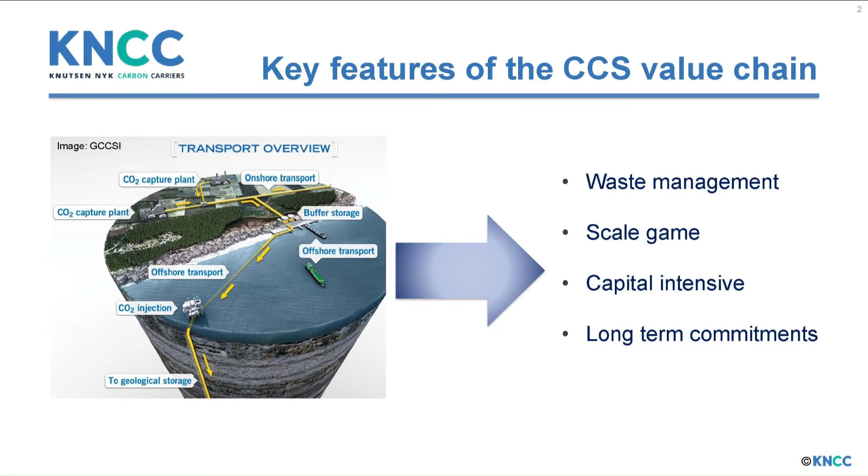And everybody should know that if you're dealing with waste management, then you have to do this as cheaply as possible. And one of the ways to achieve low cost is scale. So waste management needs scale. So this is also a scale game. And thirdly, this is extremely capital intensive. I think we still haven't seen the total cost and the consequences for those who will pay for this, consumers and governments and businesses. And it comes with a huge cost for a product that doesn't carry any value. So we need to have a sharp focus on cost.

And finally, a very important thing to note here is that this is long-term commitments. You cannot start the CCS value chain today and close it in 3 years' time. It doesn't make sense. This is a very important part of the globe's greenhouse gas reduction objectives, and so this is something that we establish for the long game. From a shipping perspective, that's obvious, but it's also for the capturing or the emitters who would have to realize this, and also the storage providers.

Very important. And one important thing to note here is that we are focusing primarily, for the time being, on technical matters in this case. But I think we owe the society and the consumers that will pay for this that we also start to highlight the cost side. Because it may become a shock for many people when they realize the cost of capturing CO2 and handling it in a value chain.

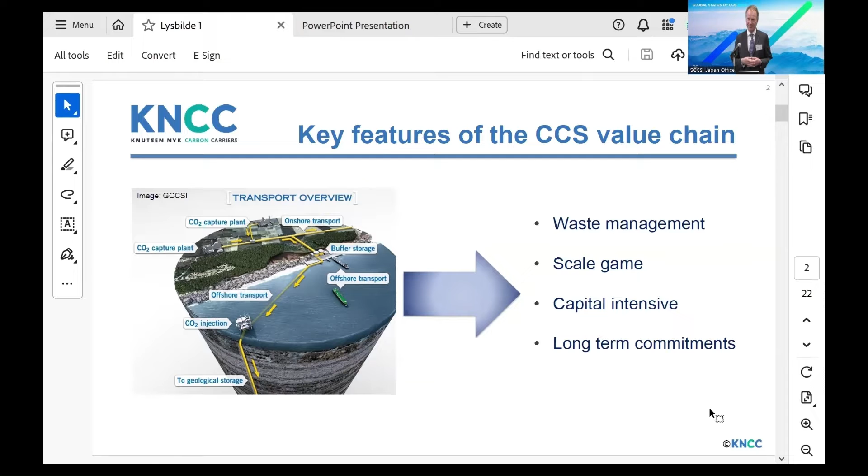The following presentation is divided in 3. We are focusing first on introducing KNCC, Knutsen NYK Carbon Carriers. Then part 2 is sort of a qualitative assessment of the 3 modes of CO2: low pressure, mid pressure, elevated pressure. And the third part of the presentation is focusing on where we are in KNCC when it comes to technical

development. I think the key messages that we would like to give, and I hope that you will sit back with that reflection after this presentation, is that we in KNCC are NYK's and Knutsen Group of Norway's key gateway of CO2 shipping. And secondly, that we are offering elevated pressure technology for handling CO2, but we are also including mid-pressure vessels and low-pressure vessels in our offering.

When it comes to part 2, I think it's very important that we can show you that elevated pressure has certain benefits that are unique compared to mid-pressure and low pressure. But at this stage, there are also quite a lot of uncertainties because nobody has actually built this yet at scale. So the findings in the study are very interesting, but still need more work in order to know which way to go.

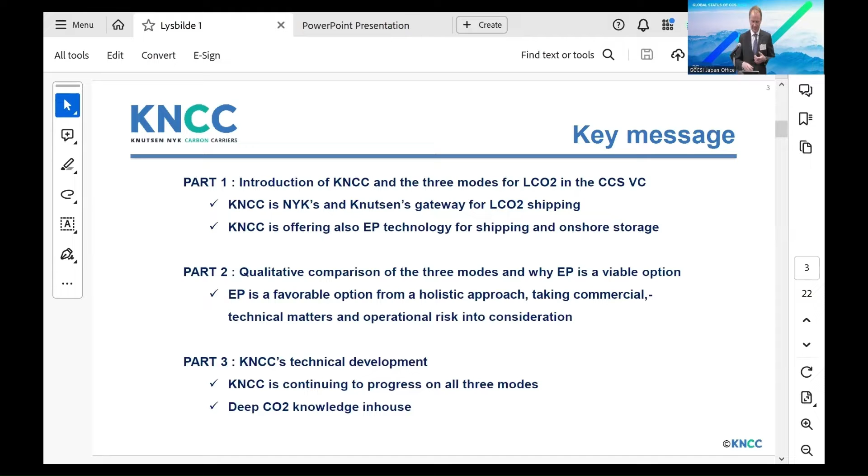I just wanted to mention a few things about our owners. We, as KNCC, are a startup company. We are 5-6 people working on the western coast, in Haugesund, and where we have gotten till today would have never been possible if we didn't have the strong support from NYK and Knutsen, our shareholders together. And I think it's quite interesting to see what we have been able to get involved in, sitting on the western coast of Norway in a tiny little village called Haugesund.

And we are primarily working globally and we don't put much effort into marketing. But the whole elevated pressure ambient technology has gained a lot of attention on a global basis. And I think that has come when people realize that the whole CCS value chain comes with a cost. And that cost is perhaps too much, so they need to look into new ways of handling all this.

In addition, we are shipping experts. We know how to serve a value chain. And when it comes to these kinds of value chains that we're discussing here today, I think the 2 points of regularity and frequency are extremely important for a shipping company that wants to serve such a value chain like this.

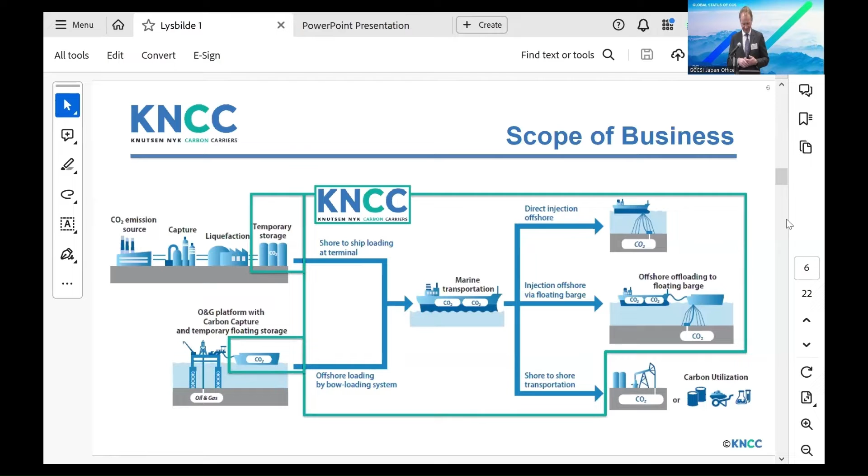So in that respect, we are the only company that is offering vessels offering the full range. We're offering elevated pressure, mid-pressure, low-pressure vessels. And we have what we call terminal-to-terminal vessels, or direct injection vessels, offshore vessels, for elevated pressure. And when it comes to mid-pressure and low-pressure vessels, we are dealing with terminal-to-terminal vessels for both those two modes. And of course, the tanks for mid-pressure and low-pressure are sort of, I wouldn't call it standard C tanks, but it's C tanks. And for our elevated pressure vessels, we have our own cargo tank cylinders storage system.

And then you can see on the bottom here the illustrations of how the vessels are supposed to operate. It looks very simple when you look at these drawings here. It's not that simple in practice, we think. But from an illustration point of view, these are sort of the three modes, three alternatives that we are offering.

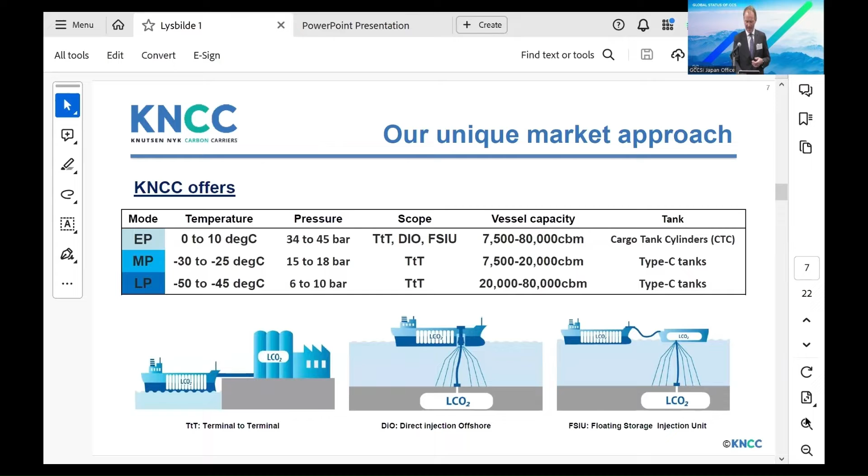If we go to the next slide, that is setting out the offering when it comes to sizes of vessels. We are offering 20 to 80,000 tons carrying capacity when it comes to elevated pressure. Medium pressure, we have an upper limit on 20,000 tons. And when it comes to low pressure, we think that there's, for the time being at least, an upper limit on 80,000 tons. Then the first vessel order will probably be mid-pressure vessels, where the design is more mature than, for instance, for low pressure.

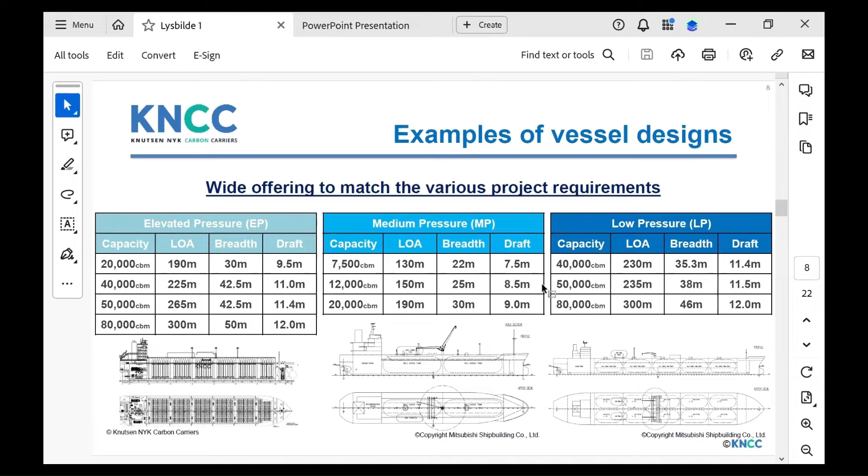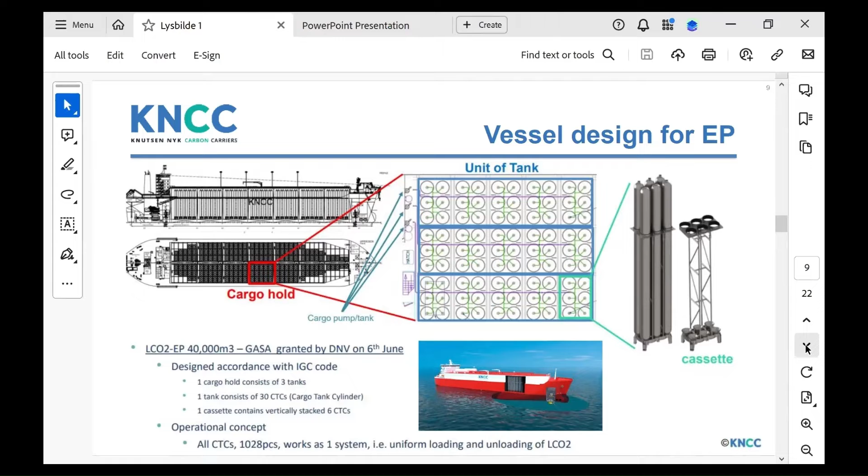And of course, we also realize that if you are offering elevated pressure vessels, you need to offer also elevated pressure onshore tanks, which we have illustrated here. We have designs for onshore tanks when it comes to simple terminals. We have floaters, we have barges, and we have floating injection units as well. So the offering when it comes to elevated pressure is quite unique and wide in that respect.

So before I'm moving on to part two, I would like you to remember two things. KNCC, we as a company, are offering all modes of handling CO2. And we regard the cost side of this as one of the key drivers, probably the most important thing to have in place if this CCS business is going to fly. Next.

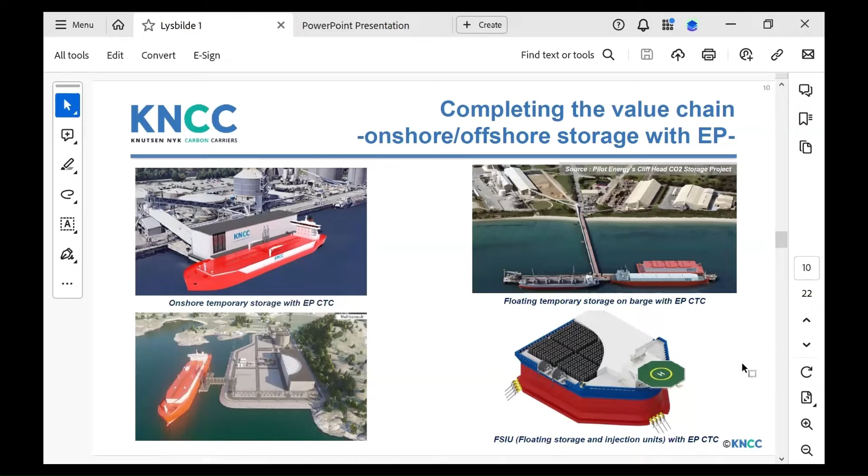The following slide sets out the key parameters when it comes to comparing elevated pressure, mid-pressure, and low pressure. We have divided that into 5. It's operation and risk matters. It's cost and energy consumption matters. It's net transporting volumes on the vessels. It's how the CO2 behaves in the various modes. And it's also a bit about the tanks that will be used for handling the various modes.

This slide is setting out basic information. It only says that when you are deciding which mode of CO2 you're going to choose, you need to have some matters on the front of your mind when it comes to operation. And that is, of course, that you need to have a buffer, to be on the safe side when it comes to dry ice formation risk of the CO2, the triple point.

That is extremely important. Secondly, it's the matter of impurities, which we will hear more about from Matt afterwards: how elevated pressure, mid-pressure and low pressure are able to handle impurities in the CO2. And CO2 specification is a very hot topic in our little society these days.

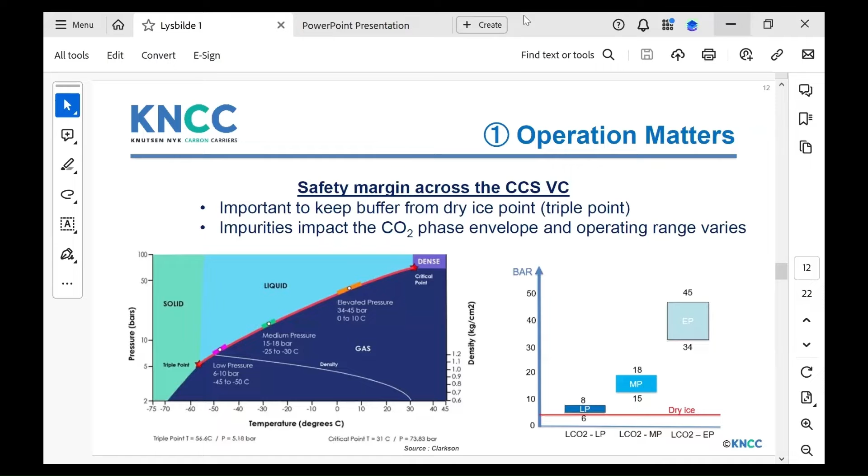And Northern Lights had their online webinar regarding their new required specification for CO2. I think it was even more popular than this seminar today. So it just tells us all that the CO2 specification is a really, really important matter that needs to be observed. Next slide, please.

When it comes to energy consumption, we have looked into liquefaction, storage, transportation and injection to the wellhead. And from that point of view, we are not surprised by this, but it seems that we have found that elevated pressure across the value chain is less energy intensive, i.e. less cost intensive than the other modes.

In many ways, that goes without saying, because apparently we use a lot less energy by keeping the CO2 at ambient temperature. But finally, we have had a study now evidencing these facts for us as well, and that is of big importance to us. And I think, again, it boils down to the cost side here. If you are contemplating building a CCS value chain, you need to take these kinds of findings into consideration. Next slide, please.

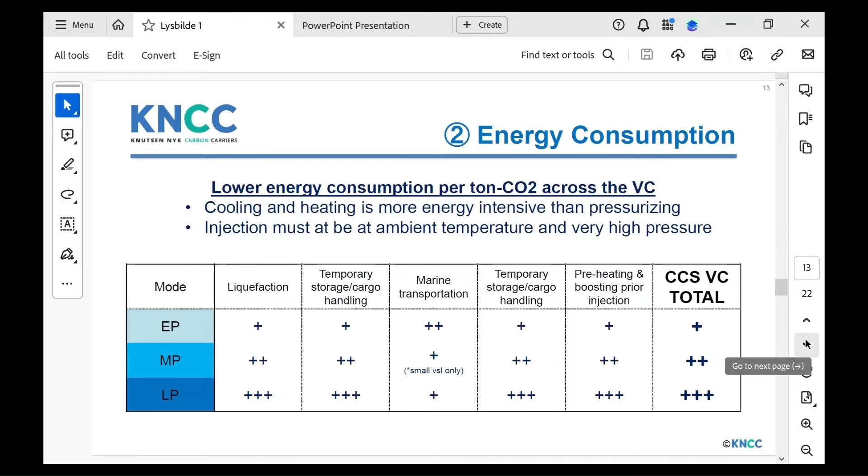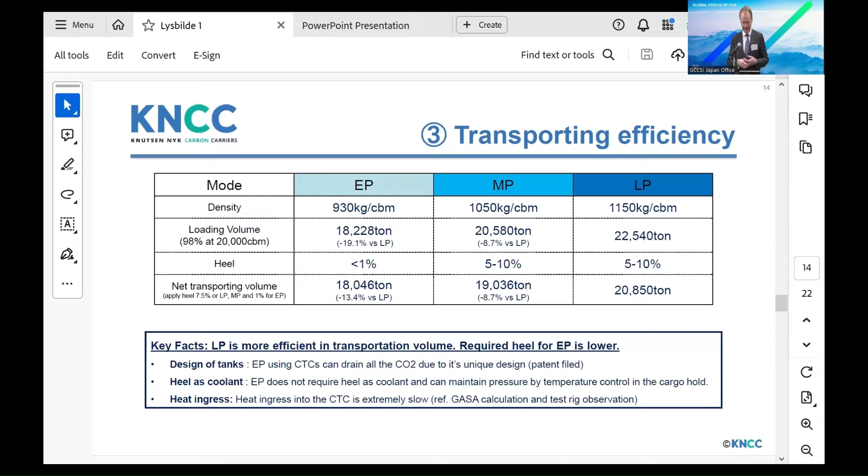We all know that there's no free lunch in the world, so even elevated pressure has its disadvantages, and the most important one is actually the density. Density of elevated pressure compared to mid-pressure and low pressure is less, so that means that you need bigger vessels, or you need to do more rounds to handle the same volumes of CO2 compared to low pressure and mid-pressure. However, there are some mitigating factors, but the overall conclusion doesn't change.

But there are some mitigating factors, for instance the required heel in the tanks, i.e. the required amount of CO2 that you need to keep in the tanks after discharging. And the heel requirement for elevated pressure is far less than for mid-pressure and for low pressure. This is related to the need to have the tanks at a certain cool temperature when you're going to load the CO2 on board the vessel again. But as I said, it makes the picture slightly less bad for elevated pressure, but the overall conclusion is that the density for elevated pressure, also including heel, is less than for the other two modes. Next, please.

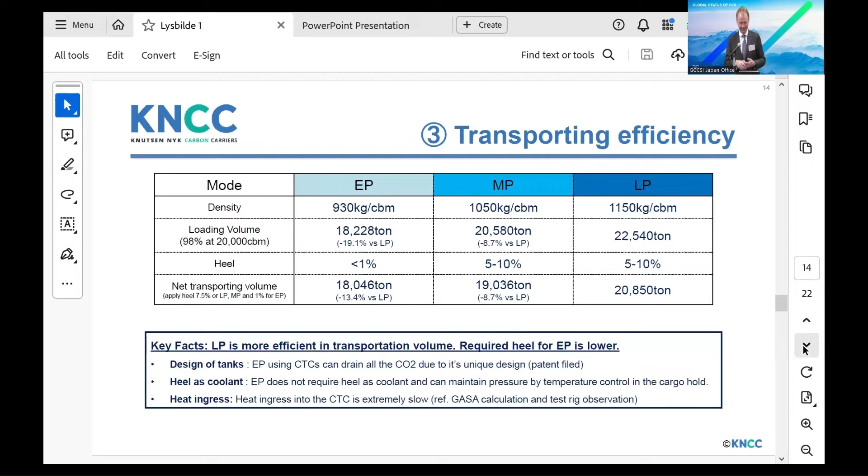I'm coming back to this afterwards, but in Haugesund, where we have our office, we have also built a CO2 test rig, where we have stored CO2 in our tank system for several months. And we have discovered two things, I wouldn't say it was a surprise, but we were happy to have it confirmed. And that is that when you keep the CO2 in the cylinders, even when the outside temperature is fluctuating, the CO2 is quite stable and moves along with outside temperature.

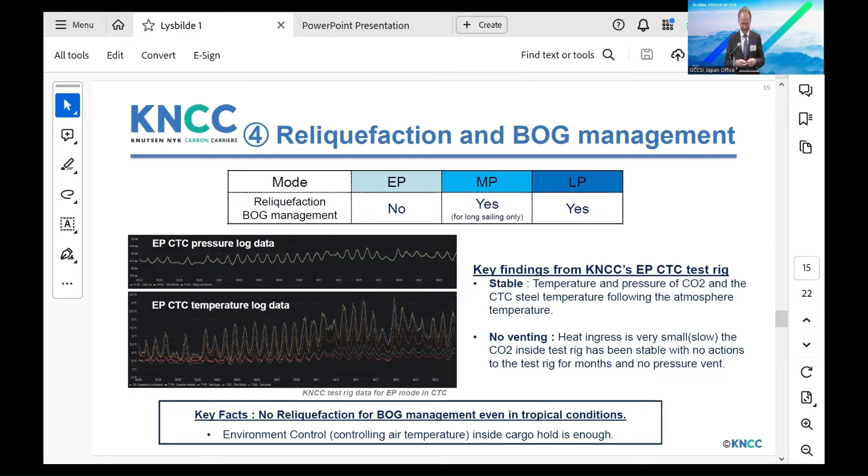And if you look at the black diagrams here, it's a bit difficult to see on the screen, but it shows how the CO2 is very stable over time. This time scale here is over 2 months. So that means that, for instance, we don't have any boil-off from the tanks, and we don't have a need for re-liquefaction when we are carrying the CO2. That is definitely a plus. Next.

But also, of course, when it comes to putting low pressure tanks, for instance, on shore, that comes with certain challenges, both in production and construction, and also timing wise. But when it comes to the tanks in itself, I think it's fair to say that it's still technology that needs to be further developed, but we will get there in the end.

So summarizing part 2 then, I hope that you have understood that there are certain pros and cons with the 3 modes of CO2. And the conclusion when it comes to which mode you should use is really dependent on the project-specific specifications that you're dealing with. And the most important thing is that at least we are evaluating those 5 parameters that I have discussed now.

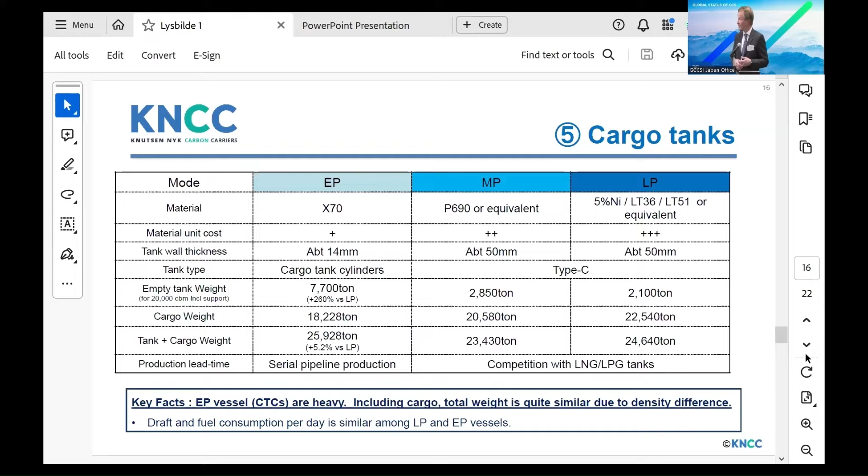I will quickly start to summarize and conclude with part 3, and that is just a quick overview of our technical development over the last year or so. So yeah, next slide. Sorry, I forgot. Next slide. And one more next. Here we are.

And further, we have done what we refer to as HAZID, which is sort of identifying all major risks related to our systems in order to verify that this is acceptable within a sort of risk frame system as well. Next slide, please.

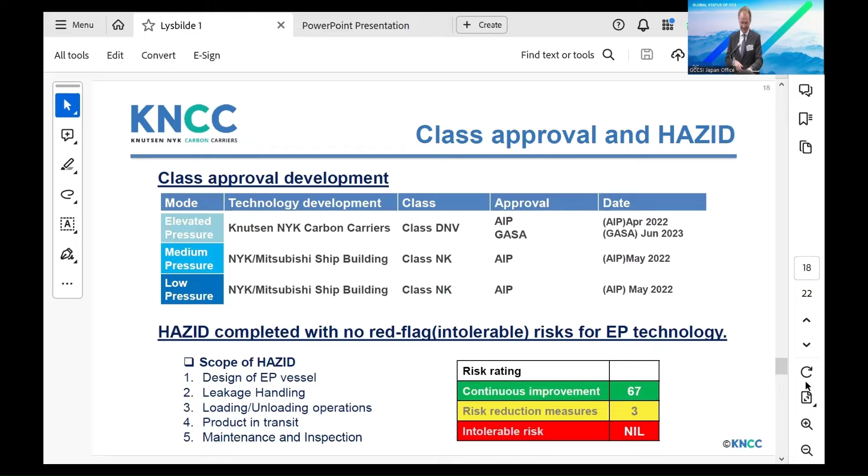We have completed phase 1 for this rig. And now we are in the planning and started to do phase 2 testing, which is focusing on corrosion and leak testing. And phase 3, we are aiming to look into how CO2 will react to impurities. So this is quite interesting from an industry point of view.

And for us as a company, it's also quite interesting because we are learning a lot, and we foresee also to use this facility to train crew for vessels going forward. And this will provide sort of an excellent way of educating all the crews on the CO2 vessels that will be needed in the future. And that is quite a lot.

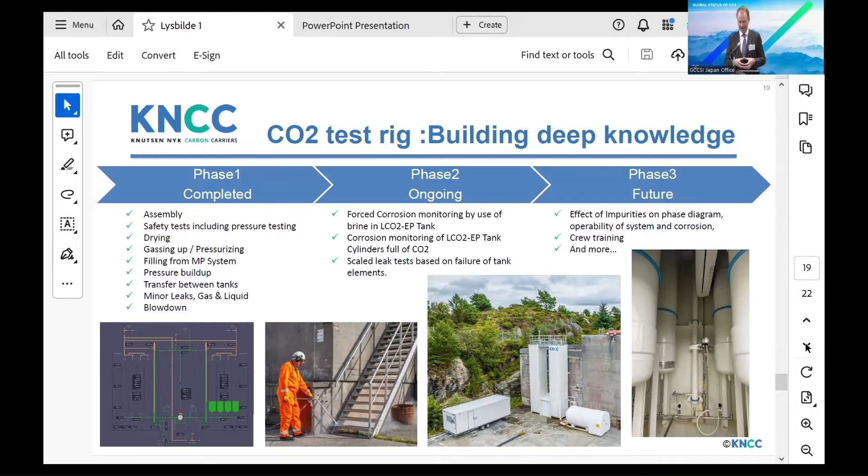And if you show the next slide, please, we have been reaching out to the companies that we have been working with over the last 2 years. And this is a few of them. I would say it's not half of them, but around half of the companies that we have been engaging with. And to us, it's a big pleasure to see that there are so many companies that are looking into elevated pressure for real, and that they see the benefits of working and developing elevated pressure as a third real credible alternative.

I really hope that you will be of the same opinion after this presentation. And if not, please call me up. Please approach me after this one, and then I will convince you. Thank you very much for the attention.

Mr. Anders, thank you very much. Now we are moving on to the next presentation. We will have a presentation about the comparative study results regarding EP, MP, and LP via the CCS value chain from Chiyoda Corporation and NYK. NYK has been leveraging its extensive experience in ocean-going shipping to continue creating new value through decarbonization efforts. Since its early period, Mr. Takahiro Rokuroda, Deputy General Manager of the Green Business Group, has been involved in NYK's decarbonization efforts. Drawing on his wealth of experience, he will explain the comparative study results for the three methods of liquid CO2 transportation throughout the CCS value chain.

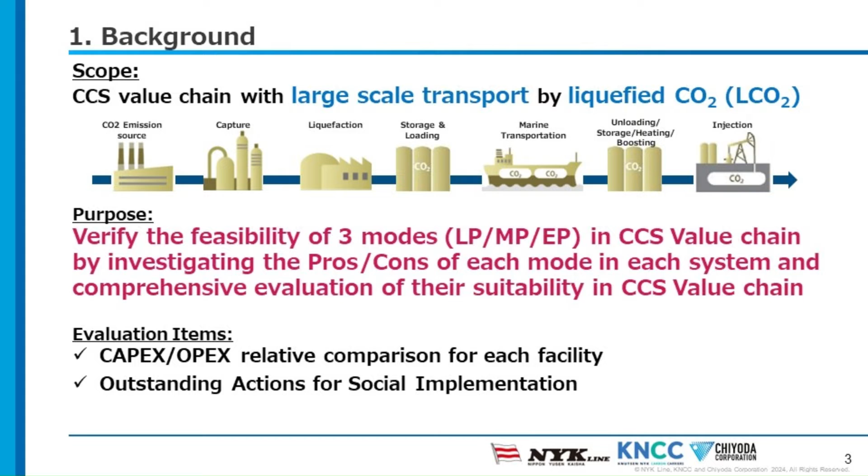Next slide please. Firstly, to capture CO2 from the initial emission source, we assumed that CO2 would be recovered from combustion exhaust gases using amine chemical absorption. Regardless of the liquefaction method, we did not include this stage in this comparative study as we consider it to be the same. Next, a recovery volume of 2 million tons per year was assumed for liquefaction. Additionally, for the liquefaction process, we thought of an external refrigeration process using propane for this study.

Furthermore, for CO2 transport ships, we considered two cases, domestic transport and international transport. For domestic transport, we assumed a distance of approximately 1,500 kilometers from Osaka to Hokkaido. We regard it as a long-distance transport of roughly 5,600 kilometers from Japan to Australia for international transport. The capacity of each transport ship was assumed to be 20,000 cubic meters for domestic transport and 40,000 or 50,000 cubic meters for international transport, depending on the method.

Additionally, for the transfer conditions during the final storage, wellhead, after primary storage at the receiving end, we set conditions of 10 MPa gauge and 20 degrees. The storage process is assumed to be the same regardless of the liquefaction method, and we excluded it from this study. To summarize, this comparative study of the three liquefaction methods focuses on the stages following liquefaction: primary temporary storage and transport on the shipping side and temporary storage on the receiving side. Though it may seem detailed, the primary storage on the receiving side includes pumps for pressurization and heaters for heating, which we will explain in more detail later.

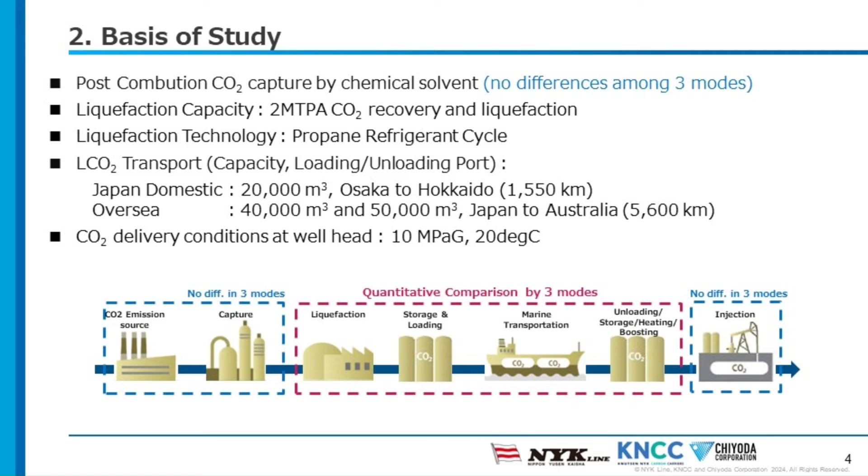Next slide please. Next, I will explain the cases considered in this study. While we may repetitively explain, the conditions of MP, LP, and EP on the left refer to the temporary storage at the loading end and temporary storage at the receiving end, as well as the operational conditions for each transport. Additionally, as mentioned in the assumptions for this study, we considered two cases, domestic and international transportation, for the three liquefaction methods. Regarding international transportation, due to the difficulty of increasing the size of the vessel for MP, we conducted a comparison of LP and EP for international transportation in this study. Furthermore, as highlighted in the comparison of the three methods in the KNCC presentation, the difference in density at CO2 liquefaction is highlighted as a feature of each method.

The table includes the liquid densities of CO2 for each method. It was found that there is approximately a 10% difference between MP and LP and approximately a 20% difference when comparing EP and LP. From the perspective of transporting mass relative to a fixed volume, LP, with its higher liquid density, can carry more. In this study, to compensate for this difference, in consideration of EP, both for domestic and international transport, we increased the capacities of transport ships and tanks significantly compared to the remaining two methods.

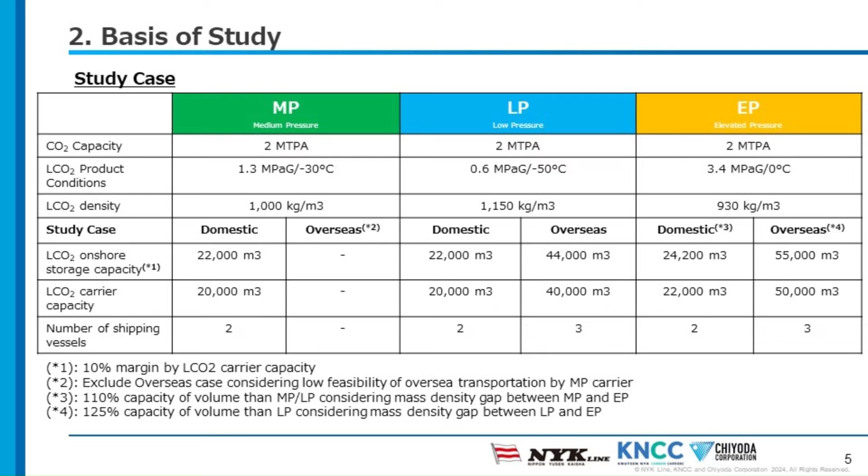While it may be conceivable to adjust the number of vessels or the number of voyages while keeping the ship's capacity the same, for this study, we adjusted the capacities of transport ships and tanks while keeping the number of vessels constant. Additionally, considering that the tank capacity of temporary storage may vary depending on project conditions, for this study, we set the storage capacity of tanks at 10% higher than that of transport ships. Please proceed to the next slide.

Next, let's discuss the assumptions regarding costs. This slide will mainly focus on onshore tanks. In the results of this review, CapEx or OpEx will be presented in terms of the cost per unit of CO2, unit cost. CapEx includes only material and construction costs.

As for OpEx, it considers only electricity costs, and for details on the electricity cost settings, please refer to the slide. The equipment using this electricity mainly includes compressors, pumps, electric heaters, etc. While there may be various other utilities, for this review, we assume a constant utility consumption regardless of the three methods. Now, let's move on to the next slide, please.

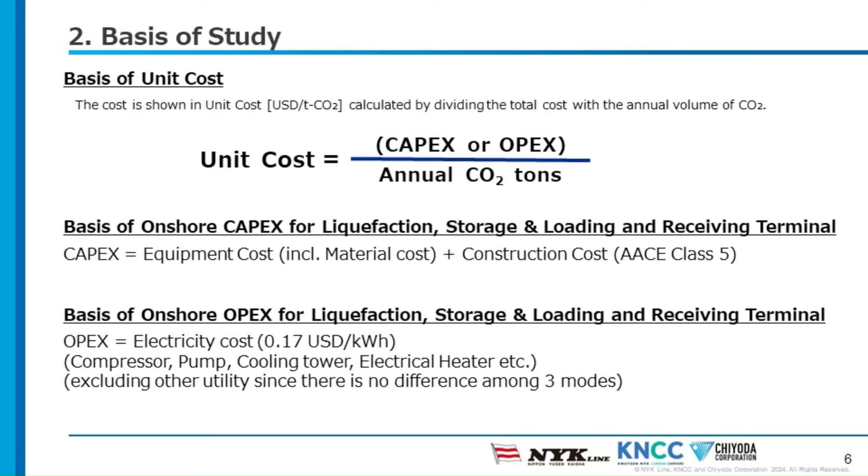Here is an explanation of the estimated cost for the vessel. Similar to the explanation provided by Mr. Tamagawa regarding onshore facilities, we are also making calculations for expected costs to a certain extent, but for vessels. In terms of CapEx, we have incorporated estimates of the reasonable prices for each of the three types of ships through consultation with shipyards, although there are differences among them. However, these estimates have not included interest rates and various incidental expenses.

On the other hand, concerning the OpEx of the ship, there are various costs such as crew costs, labor costs of crews on board, costs of different supplies, costs of lubricating oil, dock costs incurred when entering the dock, P&I insurance, and expenses for ship management. Additionally, during the ship's operation, we have also included related travel expenses, such as port costs when calling at ports. As for costs that significantly deviate from our assumptions, these would be the interest on the initially proposed CapEx and other miscellaneous expenses. Next, please.

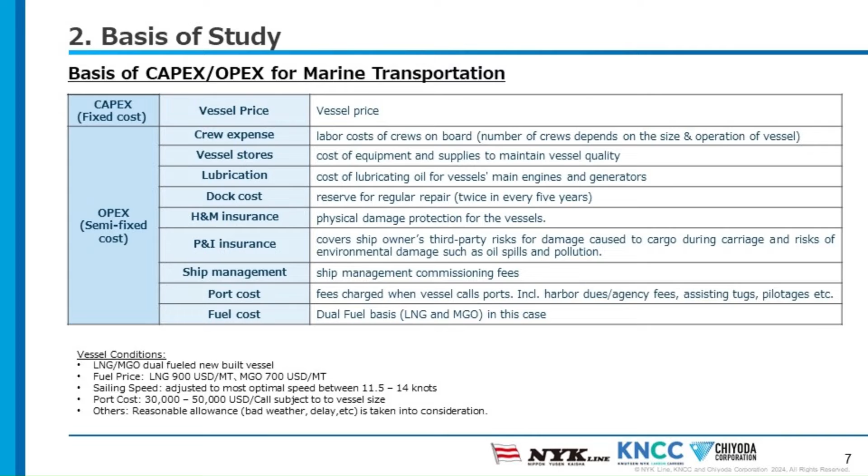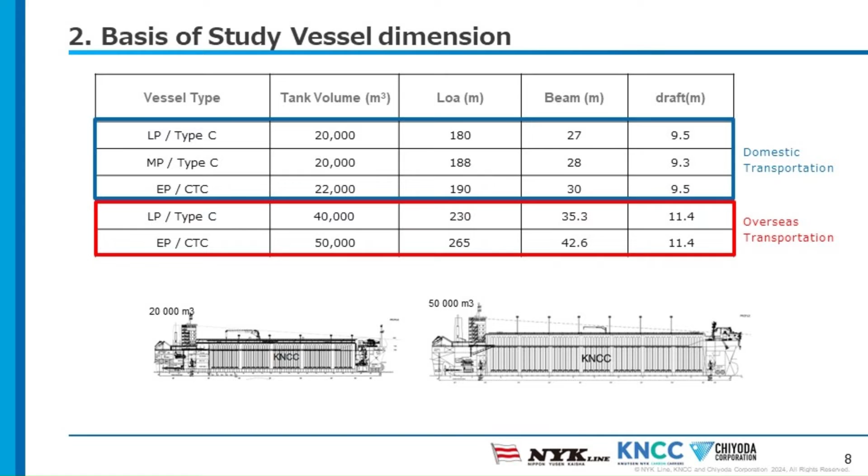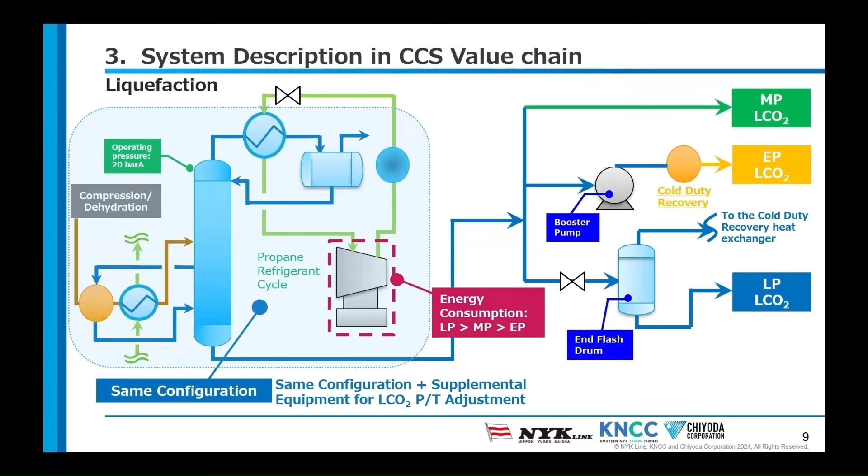One of the characteristics of this liquefaction method is the refrigeration equipment highlighted in the red box. As qualitatively described, refrigeration equipment consumes more energy at LP and decreases energy consumption at MP and EP, which is also mentioned in KNCC's presentation. Please move on to the next slide.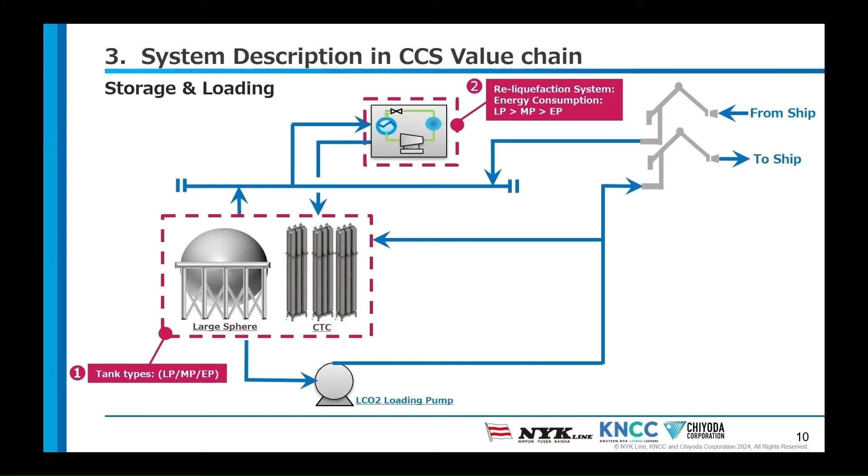Here is an overview of the facilities for temporary storage on the receiving side. The configuration of tanks and BOG reliquefaction units is the same as that of the temporary storage on the shipping side mentioned in the previous slide. However, for the receiving terminal, we have added booster pumps for pressurization and heaters for warming towards the upstream. The tank types and features of the BOG reliquefaction unit here are the same as mentioned before.

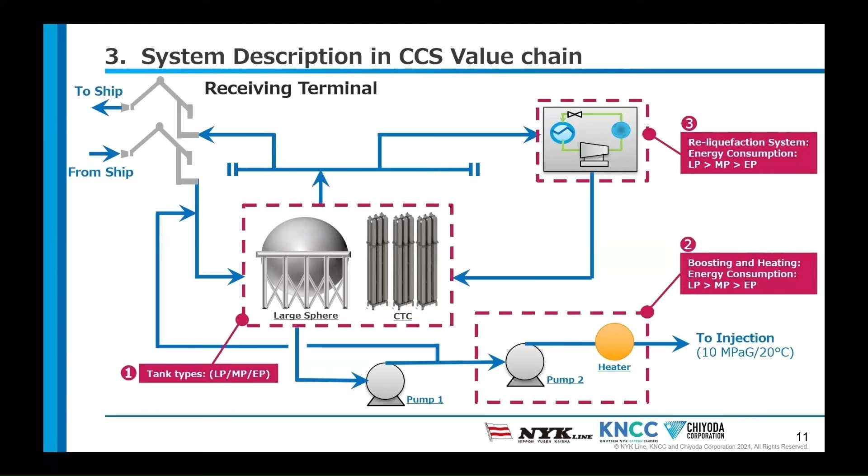The energy involved in the booster pumps for pressurization towards injection varies with the operating conditions of each method. In this case, the difference with the set pressure of 10 MPa gauge is largest for LP and decreases for MP and EP. In other words, the energy for LP is slightly higher. Similarly, for warming, the temperature difference with the set operating temperature of 20 degrees is largest for LP. Therefore, it can be qualitatively understood that the energy required for these pumps and heating elements is higher for the LP method. Next slide, please.

Let me explain the quantitative comparison results of liquefaction methods, focusing on the CapEx for domestic transportation cases, comparing MP, LP, and EP. The comparison results highlight 2 points. The CapEx of the temporary storage tanks is highlighted in purple and orange, and the CapEx of the transport vessels is highlighted in pink. I will provide detailed information in subsequent slides regarding temporary storage, but particularly for MP, considering requirements such as project duration, the number of tanks increases significantly, leading to a considerable rise in CapEx, including construction costs. For transport vessels, qualitatively, in the case of EP, as mentioned earlier, increasing capacity and weight contribute to the increase in CapEx.

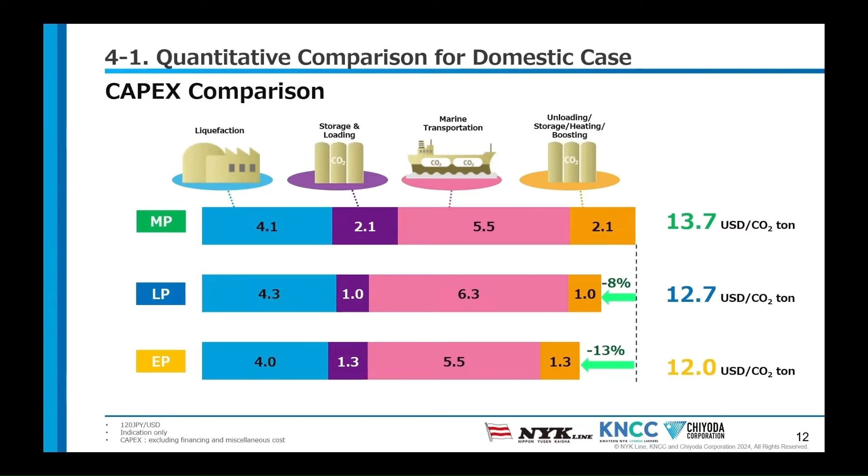On the other hand, in the case of LP, the need for nickel steel adoption due to low temperature specifications adds to the material-related factors in CapEx. Considering both factors contributing to the CapEx increase in this study, LP is higher than EP. Evaluating the entire value chain, LP and EP show around a 5% difference, but considering the precision of the estimates in this study, LP and EP are almost at the same level in CapEx. Meanwhile, MP stands out as it has higher CapEx than the other two methods due to the high cost of tanks on both the shipping and receiving sides. Please go to the next slide.

Here are the results of the quantitative comparison of OpEx for domestic transportation cases. Similar to the qualitative explanations provided in KNCC's presentation, there are 3 notable characteristics in the comparison results of OpEx this time. As the blue section indicates, the first point concerns the liquefaction process. LP's OpEx is higher due to the significant power difference required during the cooling of the liquefaction. It decreases sequentially from LP to MP and then EP.

The second point pertains to the OpEx of temporary storage on the receiving side. As mentioned qualitatively earlier, LP exhibits the highest OpEx due to the energy required for booster pumps for pressurization and heaters towards injection. EP shows the lowest OpEx among the methods, confirming the same trend as qualitatively described earlier. Regarding the OpEx related to transportation, LP is considered advantageous regarding tank capacity, weight, and fuel efficiency. This is reflected in LP having the lowest OpEx in the results. Considering OpEx for each process in the CCS value chain, EP has the smallest OpEx, followed by MP and LP.

Additionally, the chart displays the CO2 emissions generated during the liquefaction, storage, and transportation processes, represented as electricity required for liquefaction. This calculation assumes that a base of thermal power generation and LNG are used as fuel for transporting vessels. The results show that CO2 emissions increase sequentially from EP, which has the lowest OpEx, to MP and LP. As this value chain aims to recover CO2, it's crucial to minimize CO2 emissions during the process. Next slide please.

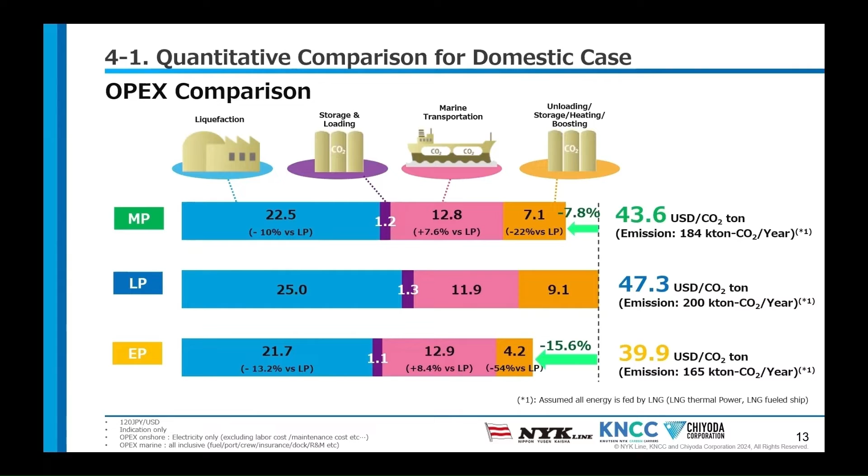In the previous 2 slides, we discussed CapEx and OpEx in terms of CO2 emissions per unit. This slide presents the comparison results of the total CapEx and OpEx. By aligning these two side by side, it's evident that OpEx comprises a significant portion. This aspect aligns with the comparison mentioned during the OpEx analysis, where the sequence is reflected in the total values. In this case, EP has the smallest total value, followed by MP and then LP. This indicates that EP has the lowest combined CapEx and OpEx, followed by MP and LP, respectively.

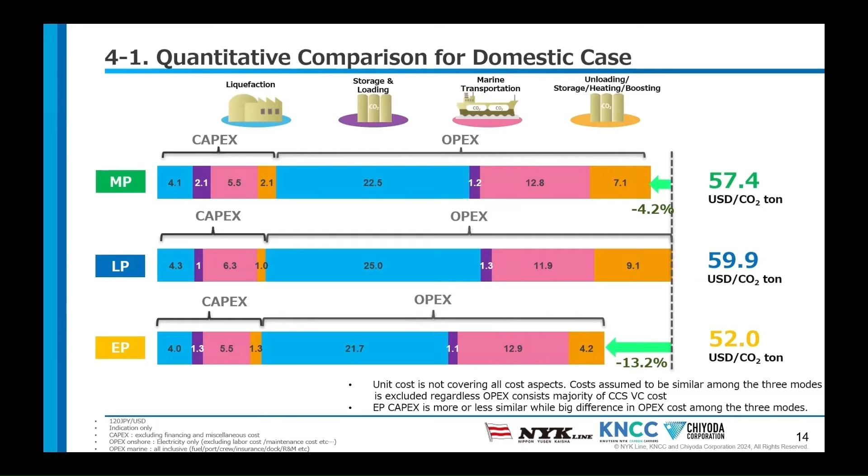Next slide please. Here, we will explain the comparison results focusing on the temporary storage tanks as introduced in the previous CapEx comparison. Several points are highlighted. Firstly, it's assumed that MP and LP use spherical tanks while EP uses card-type cylinders, CTC. It's noteworthy that for MP and LP, carbon steel is assumed as the tank material. However, due to safety regulations, if the thickness of the material exceeds 38 mm, annealing at welding is required, making on-site manual metal arc welding necessary.

Thus, the maximum tank capacity for MP is set at 900 cubic meters, and for LP, it's 5,000 cubic meters, considering conditions where manual metal arc welding can be accommodated. As a result, for domestic transportation, the tank capacities on the shipping side are 22,000 cubic meters for LP and MP combined and 24,200 cubic meters for EP. To meet these capacities, 28 tanks are required for MP and 5 tanks for LP. Construction costs are represented in ratios, and the third point from the top indicates the weight when empty.

Since EP operates at high pressure, the weight is 2 to 3 times heavier than the other methods, making the material costs the highest among the three. On the other hand, due to the necessity of manual metal arc welding, which does not significantly improve efficiency on site, MP requires welding for 28 tanks, resulting in significantly higher construction costs, making MP the most expensive in this cost comparison. Regarding LP and EP, as explained earlier, the consideration of enclosing CTC in buildings for EP incurs additional costs, making it slightly higher than LP, which doesn't have this requirement.

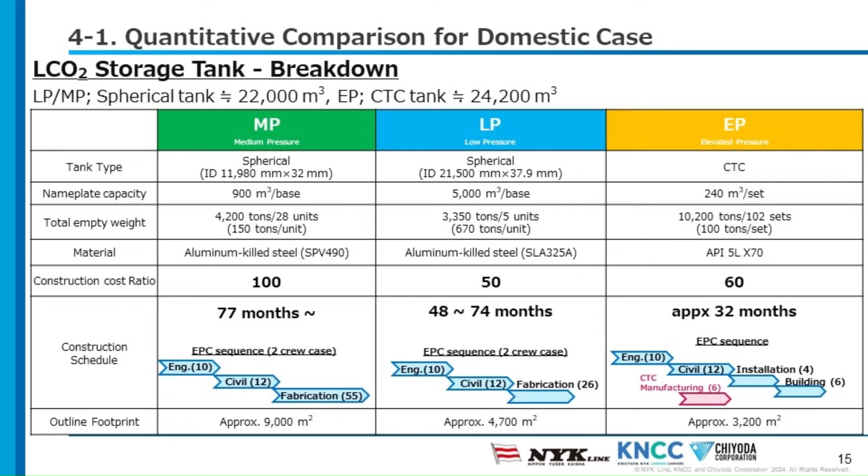Another highlight is the tank-related construction period. Although we present a range here, assuming on-site crew as a baseline, in practice, the availability of crew and the sequential nature of the work mean that the construction period may significantly lengthen for each MP and LP. While these numbers may vary based on crew availability, it's essential to recognize the challenge posed by these construction periods. Regarding EP's CTC, since there's no on-site welding required, alongside design and civil works, parallel production of CTC and transportation for installation could mitigate the risk associated with construction periods, as it eliminates the need for on-site application processes, as confirmed from this study's results.

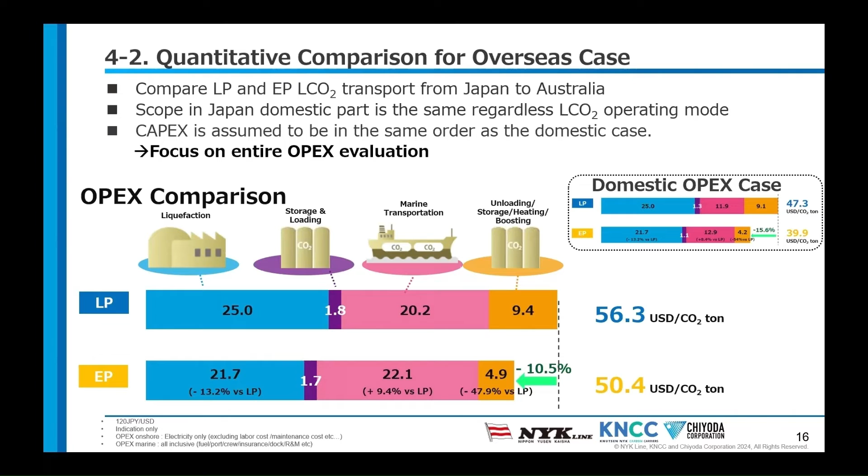Next slide please. When considering challenges for societal implementation, examining the three liquefaction methods within the CCS value chain reveals that each method is currently being explored based on existing technologies or materials.

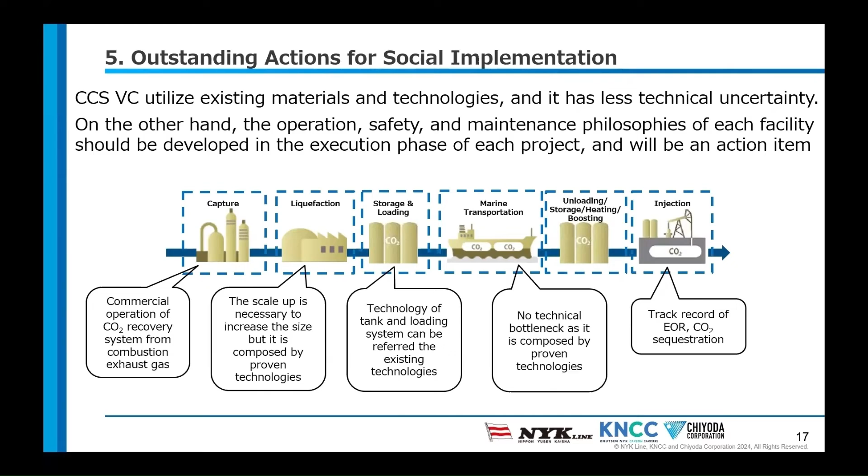In terms of development aspects, there are few challenges, as all three methods lack significant technological obstacles. However, regarding operation and maintenance approaches, each method requires tailored engineering themes to be addressed in the subsequent phases of each project. Next please.

In this slide, we organize action items for each liquefaction method towards social implementation, as mentioned in the previous slide. Regarding the tanks for MP and LP, issues such as the increased base number of tanks leading to considerations on the tank construction period, securing welders, and cost challenges are raised. One solution is the adoption of pressure vessel type tanks. Also, regarding the loading operation procedure for liquefied CO2, while we believe it is similar to EP, further confirmation is needed.

Additionally, regarding transport vessels, MP presents challenges, considering the difficulties in both technology and economics, especially with regard to scaling up to larger vessels. For LP, due to the similarity of conditions to the triple point, there are concerns about dry ice formation. It is crucial to design preventive measures against dry ice formation or to have a design that can promptly respond if dry ice forms unexpectedly. Since operational testing of LP demonstration vessels is progressing, we anticipate finding solutions from there.

Furthermore, compared with CapEx, the high cost of LP is a significant issue, so continuous consideration of new materials or certifications for cost resolution remains a challenge. Lastly, concerning EP, we identify common challenges, as CTC is common between land tanks and transport vessels. EP still lacks progress in areas such as operational guidelines for CTC tanks and safety philosophies compared to other methods, so further efforts are required. Also, due to the dense arrangement of cylinders, a probabilistic inspection method is deemed necessary.

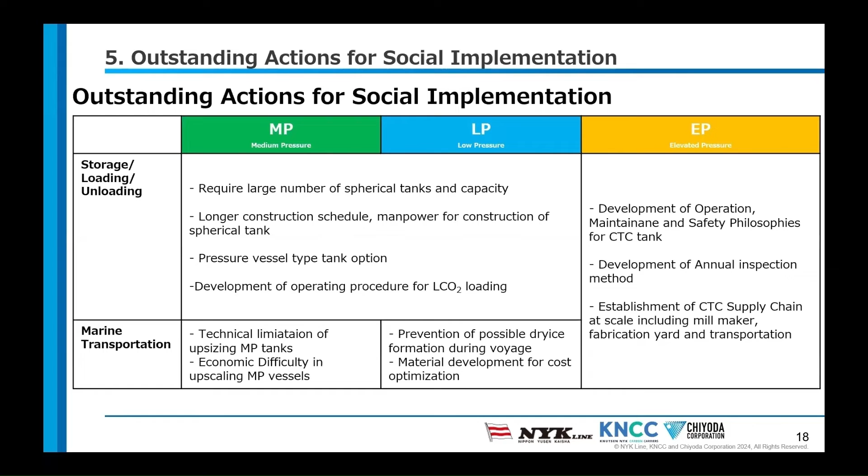Lastly, let me summarize this presentation. First, we conducted a comparative study of 3 liquefaction methods regarding domestic transportation. Concerning CapEx, we found that LP and EP are at a similar level, while MP, due to a higher number of tank bases, as mentioned earlier, incurs slightly higher costs than the other 2 modes. Additionally, for OpEx, there's a tendency for OpEx to be higher in EP, MP, and LP order, particularly due to the liquefaction process and the final pressure boosting process on the receiving end.

Regarding international transportation, while it's qualitatively understood that LP has an advantage from a transportation perspective, when considering the entire value chain, similar to domestic transportation, the study results still show an advantage on the EP side. Lastly, the quantitative comparative study results presented today highlight the crucial importance of addressing challenges such as project duration for temporary storage moving forward. We believe it's necessary to consider standards that involve plant owners or tank suppliers to achieve an optimal schedule. And with that, our presentation concludes.

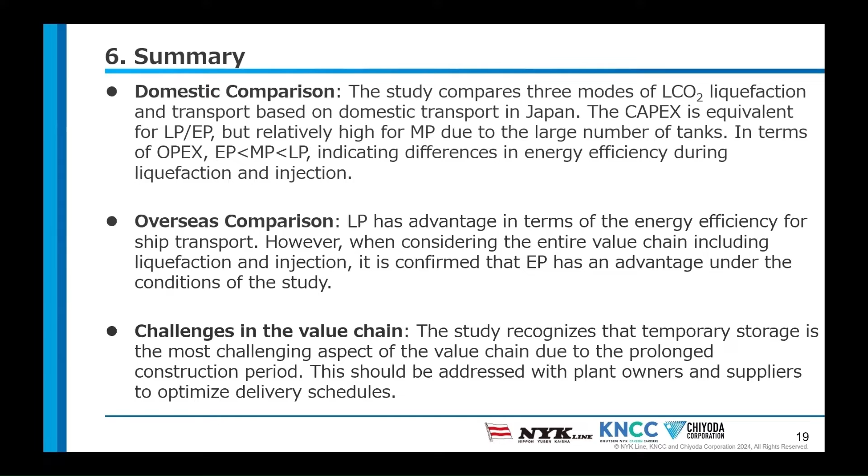We will have Mr. Matthew Healy, the next speaker, the Managing Director of PACE CCS. PACE CCS is a global leader in the design of CCS systems, with a wealth of experience in many CCS projects worldwide. Matthew has been involved in numerous CCS projects, and will deliver a presentation today on establishing and operating the entire CCS value chain, based on his extensive expertise in upstream design. Now, Mr. Matthew, please proceed.

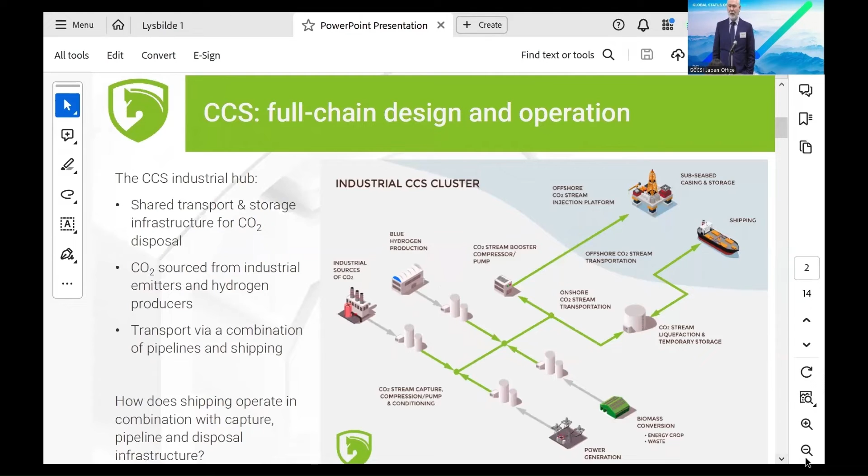Now, this means usually shared infrastructure. Shipping is an excellent example, but we're also talking about pipelines, compressors, and of course, disposal wells. When we design these systems, we need to think about operation. Cost estimates are one thing, but we all know as engineers that design and operation are two different things.

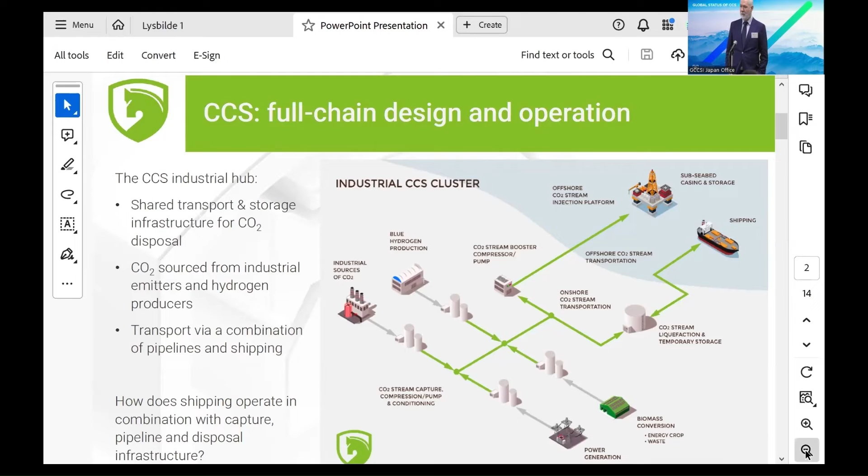This is a brand new industry. There is limited experience, and when we're designing in a brand new industry, we have to consider how these systems will operate. Because while we are sharing new information here, and I'm sure the information I've got to share is new to most people, when we operate these systems, we're going to have operators who are new to CCS. As Anders pointed out, he sees the demonstration unit as an excellent opportunity to teach operators and give them experience. The other thing that we can do as designers is keep things as simple as possible.

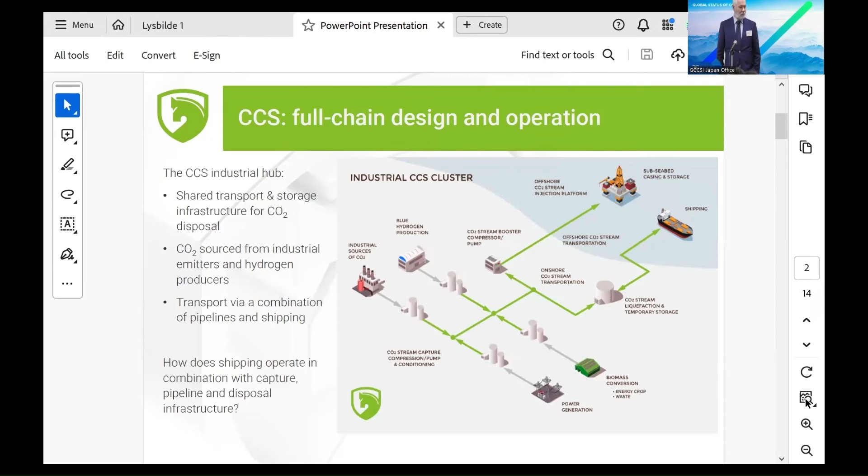So if you go on to the next slide, please. There's a list here which can't be seen on the screen, but this is a list of every operating CCS project around the world. This is from the GCCSI's annual report. So if you don't have a copy of that, I highly recommend you download it. There are about 30 projects in operation right now.

But of those 30, most of them are enhanced oil recovery. And enhanced oil recovery is not CCS. We're injecting CO2 into geological storage, but this isn't waste disposal. This is a commercially driven project that makes a profit. We don't have that with CCS. We have costs that we have to bear to dispose of our CO2. Of the remainder, most of them are pilots. We, of course, have the Tomakomai pilot project in Japan, and there are small projects all around the world.

And if we ignore the pilot level projects and the EOR projects, we're left with only two in operation. One of these is Gorgon LNG CCS in Australia. Those of you that are familiar with Gorgon will know that it has had some significant troubles, including a 2-year delay in startup. And Qatar LNG CCS, which is a very similar project to Gorgon, and a project that we know very little about. I certainly can't talk intelligently about it. If someone online or in person has had experience with this project, we'd certainly be interested in lessons learned.

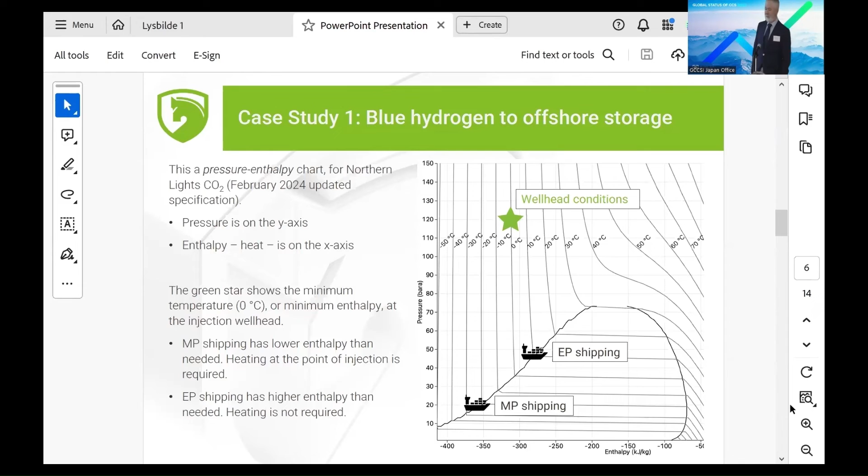It's about 100 megawatts of heating required for this case. Now, this is because when we unload our shuttle, our ship, we want to unload quite quickly so that we can get that ship back to pick up the next load and bring the other shuttle in place.

This is a showstopper. It's impractical. We cannot put that much heating on a vessel. We cannot put that much heating on a buoy. We cannot get that much heat from our ambient seawater. And so therefore, we've been unable to show that MP shipping can work. And what's happened on this project? They had to drop the MP shipping idea, and the project has returned to the concept stage.

They have failed in this case, in my opinion, to understand the true cost of the project because they didn't look at the full chain. They looked at the shipping in isolation without looking at how it interacts with those components at either side. One being the capture of the CO2, the second being the disposal. And in this case, the disposal is where they've run into problems.

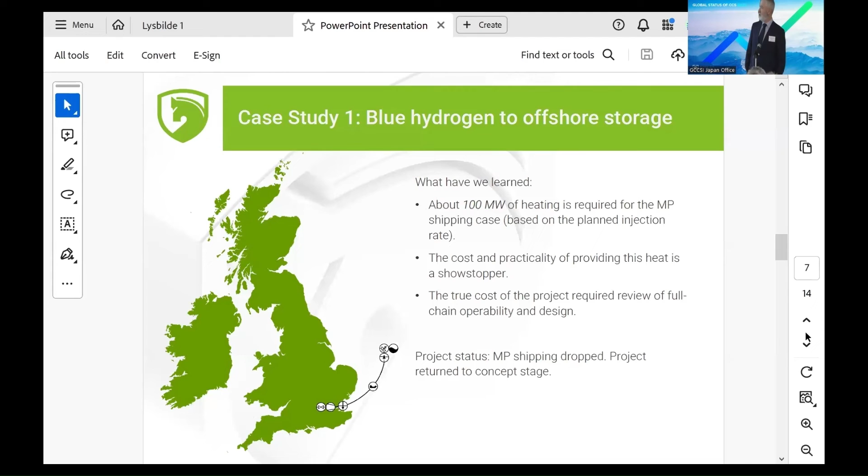I have a second case study, and this case study is a port-to-port project. So if we go on to the next slide, please. In this case, we're taking our CO2, which is coming from a power station, and we're sending it to Scotland. Why not? This is fake, obviously. We do not have a massive gas turbine at the Pace CCS office, and Scotland is not currently accepting our CO2.

We've got a very large amount of CO2 being produced. This is a large power station. They don't have anywhere nearby for the CO2 to go. There is no route for pipeline export, and there's no local injection point, and so therefore they're relying on shipping for CO2 export. And this is in an industrial area, and so the harbour itself is quite busy. And so they're exporting via this existing harbour. And our capture is obviously retrofitted onto the existing power station.

What did this project assume? Because this project is also based on a true story. Well, they assumed LP shipping. Why? Well, we need the big ships. We've got loads of CO2. We want the economies of scale. We want big ships, so therefore we get those economies of scale in our shipping process. Well, what did we learn when Pace looked at this one? Let's move on to the next slide, please.

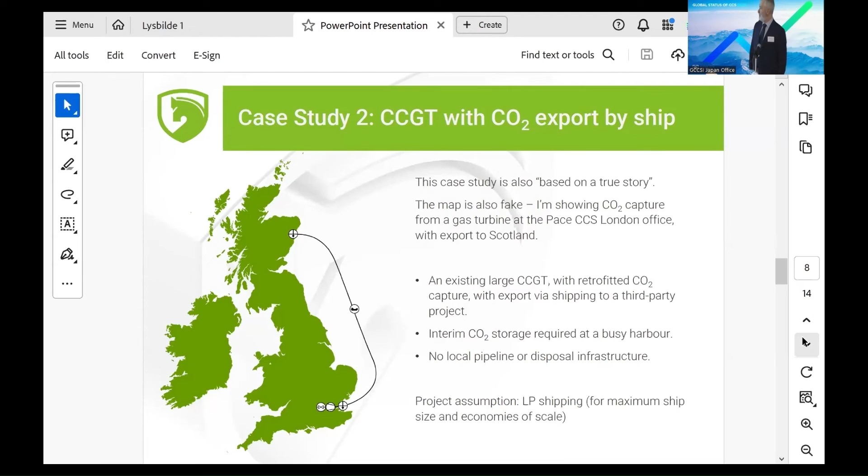Firstly, and you probably guessed that a pressure enthalpy phase diagram wasn't far away. I have now plotted on here our elevated pressure shipping and our LP shipping. And the green star this time is the enthalpy of the environment: air pressure, air temperature, ambient conditions. Now, this is a busy harbour, so they need storage at the harbour so their CO2 can be stored before it gets loaded onto the ship.

If we have a release, then the CO2 needs to get to ambient conditions before it will disperse. When it gets released from our storage conditions, it gets really cold as we drop the pressure. Now, what we can see is that the amount of heat that needs to get into our CO2 is significantly lower for elevated pressure shipping compared to low pressure shipping. And this means, firstly, elevated pressure storage is inherently safer in a busy harbour.

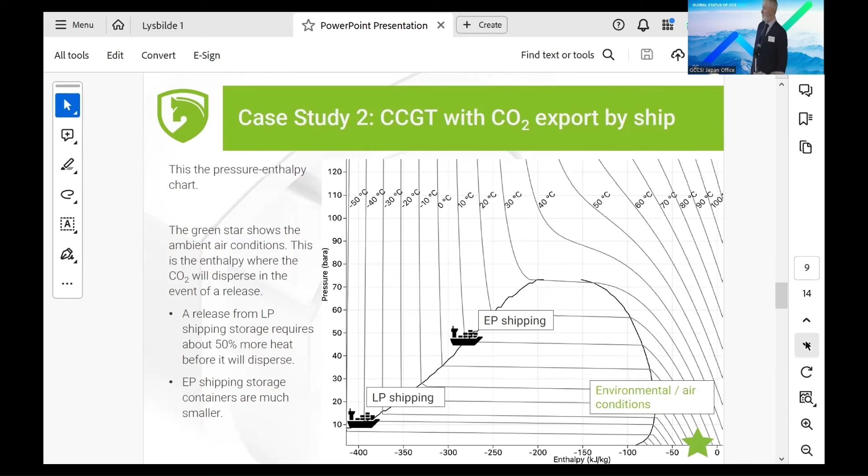And as we have seen, the elevated pressure vessels themselves are much smaller because we have these pipes rather than big tanks, which means that the volumes are smaller as well. So we have a significant difference from a safety point of view at a busy harbour. And if we go to the next slide, we'll see what it looks like when we have a CO2 release.

This is an example. This happened in 2015 in Germany. That is a CO2 truck. It's at MP conditions, and the valve was leaky. Now, the driver attempted to fix the valve and ended up with frostbite, but that was the only injury in this particular incident. But you can see the CO2 creating freezing fog, which shows you where it is.

Freezing fog is where the CO2 is so cold it freezes water in the air, and you can see it hugging the ground. Now that CO2 will only disperse once it gets enough energy from the environment. At EP conditions, this is faster because less enthalpy is required. And at EP conditions, our storage tanks are much smaller, which means we're looking at less volume. There is a significant safety difference here. And that's not the only issue with this one. If we go on to the next slide, please.

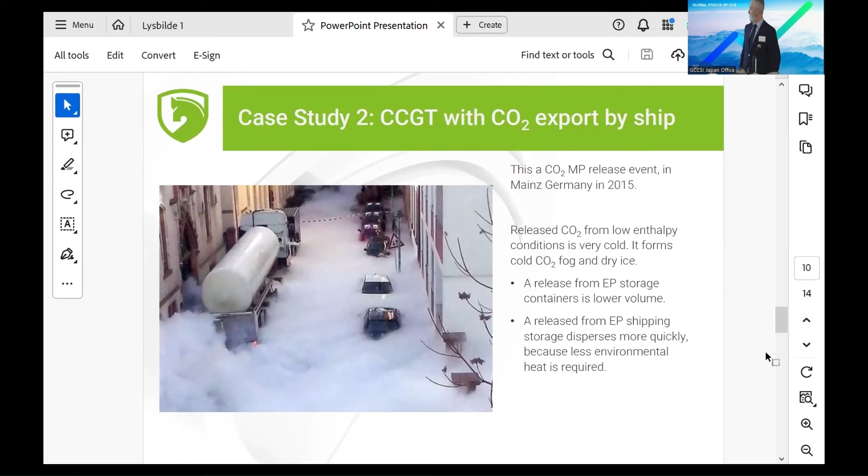It's to do with the impurities. On this table here on the right, I've got the Northern Lights specification that they announced just a week or two ago, so February 2024. And their specification to get into LP or MP shipping requires a minimum of 99.81% CO2 with only 0.19% impurities. Now, the reason for this is that CO2, when it is cold, is less capable of dissolving non-polar impurities. And our major impurities, and I've listed the 3 major impurities, are non-polar.

If we have post-combustion CO2, we tend to have nitrogen when we capture it. If we have pre-combustion CO2, we tend to have hydrogen. And if we have capture direct from hydrocarbons, as in our LNG projects, we have methane. All of these are significantly more soluble at elevated pressure conditions compared to low pressure conditions. And in fact, we can have CO2 content of about 95% for our elevated pressure conditions. And you can see the amount of impurities that we can allow of nitrogen, hydrogen, and methane. Now, what this means is that we have now got more options for our capture process.

Because we don't need the CO2 to be quite as pure, it means that it enables more technologies, and by enabling more technologies, it's likely to be cheaper. Of course, there's no liquefaction process needed. At our receival point in Scotland, if they have pipeline export, then we can just pump directly from EP conditions into the pipeline without heating it as well. And this is what I mean by an operability improvement, is that elevated pressure conditions simplifies things by allowing for simple transfer from capture to the disposal network.

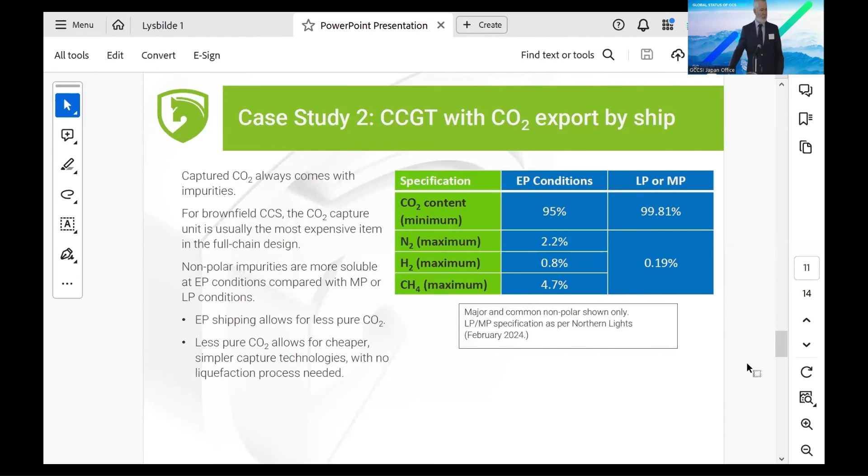And if we go to my next slide now, please. And just to sum this up, this particular case study, we've learned that EP shipping is safer, it enables lower cost capture, and just like our first case study, it required a review of the full chain to understand the true cost of the project. This project is now reviewing its LP shipping assumption.

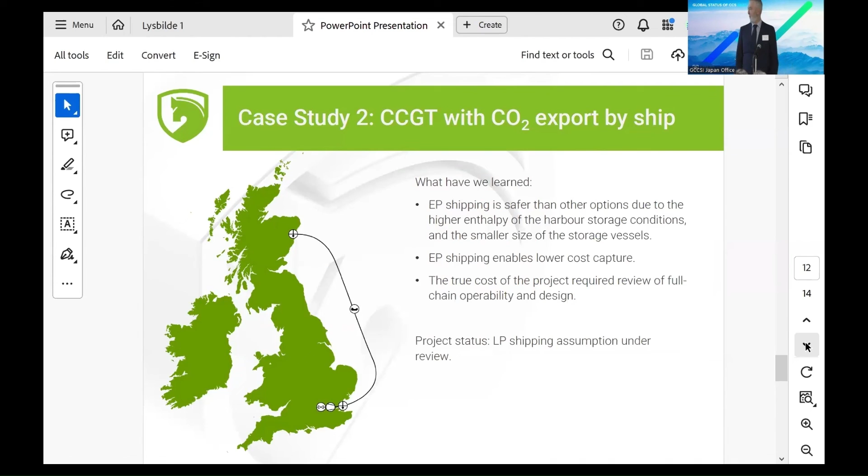And then finally, just to sum up, on the next slide, please. Thank you. And just going back to the beginning, this is a new industry. We are learning. Now, we've looked at about 15 CCS shipping projects in Europe and Asia. We've looked at about 100 projects in total around the world, so 15 with shipping. CCS is a new industry, and shipping is right now an emerging part of it. It is still very early days.

When we started each of these projects, none of them had considered EP shipping, none of them. None of them had it as an option, none of them had it as a base case. After we've got involved, I can tell you that all of these projects have either adopted EP shipping as their base case or adopted it as an option. That tells the story for us.

EP shipping is not the solution on all projects, but is absolutely one that can offer up significant advantages, as we've seen from a cost point of view, from a simplicity point of view, and from an overall full chain design point of view. Thank you.